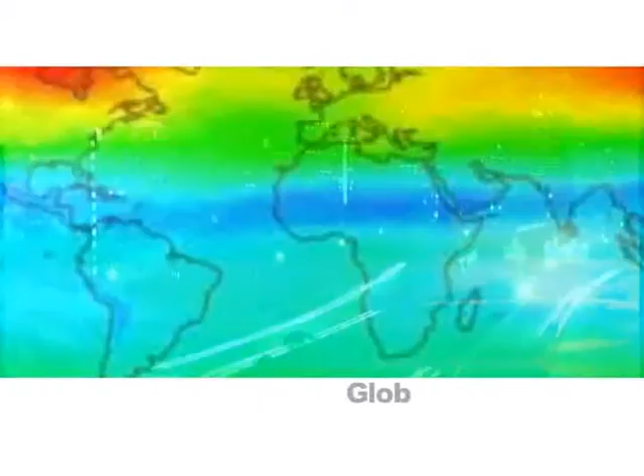Although the sun's light still penetrates, its reflected heat from the Earth's surface becomes trapped, raising the ambient temperature of the globe. The majority of scientists worldwide agree that global warming is now taking place, and most agree that it could have potentially serious consequences for all life on the planet.

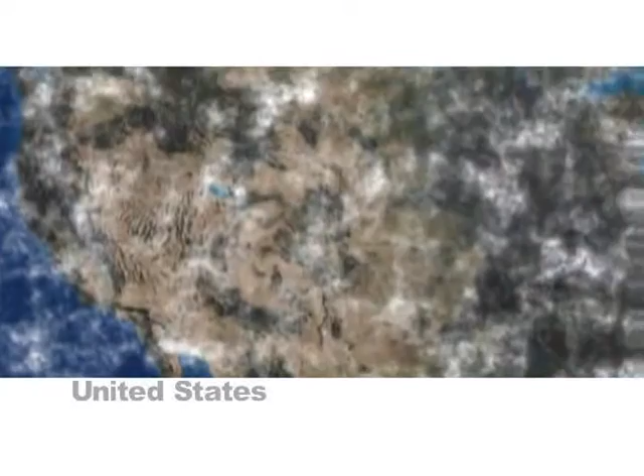Human activities in our largest population centers, the cities, account for the vast majority of these global greenhouse gas emissions. As the world becomes more urbanized, this phenomenon grows. In the United States, the situation is especially evident. Today, 80% of our population lives in urban areas, and more than half live within the 25 largest cities.

American cities and towns now account for over 80% of our national energy use, and urban land use development affects 70% of that consumption. As our urban centers expand at the edges, low-density residential, commercial, and industrial developments claim previous agricultural, forest, and open lands.

And from a resource use standpoint, this development consumes 85% more energy, 70 times more water, 50 times more lumber, and 40 times more land than higher density developments of equal size.

To sustain the diversity of life on the planet, we must change the way we relate to our shared environment and the way it relates to us. Change the way we design, develop, and manage our cities and the way we conduct life in them. This presentation provides a model for that transformation. A shift from communities that consume and degrade our natural resources to communities that consciously sustain them and improve the quality of all life on the planet.

Five overriding principles guide this design. One, the need to utilize all potential sources of energy while controlling all energy-related pollutants. Two, the need to maximize the benefits of natural systems such as wind and water flows, sunshine, precipitation, and the absorbency of land and vegetation.

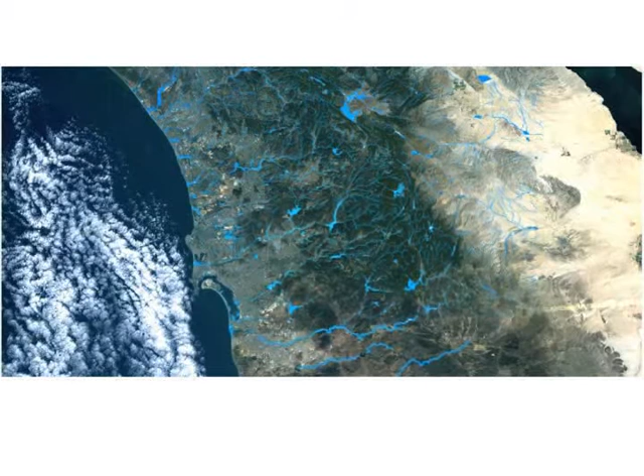The subject for this design is the Greater San Diego-Tijuana Binational Metropolitan Region, chosen to emphasize the importance of a region-wide air and watershed basin approach to sustainable development, regardless of jurisdictional borders. Today, the region supports a population of approximately 4.3 million people. They reside in the city of San Diego, the municipality of Tijuana, 17 additional incorporated cities and unincorporated areas of San Diego County, as well as the Mexican cities of Tecate and Rosarito.

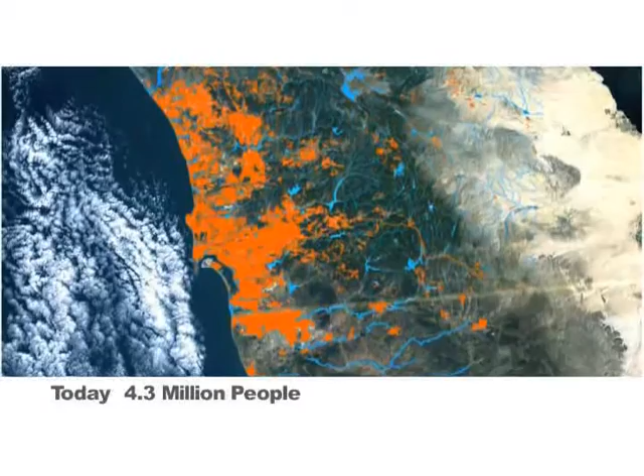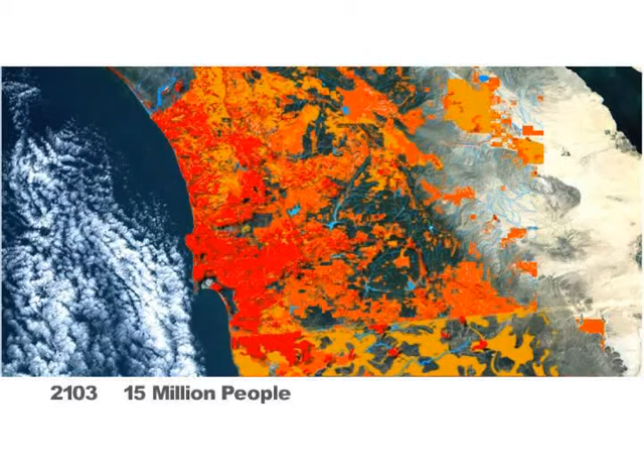Like most urban communities, this binational metropolitan region is growing at an ever-accelerating rate, with the current population expected to soar to 8 million by 2030, and more than 15 million by 2103. Under a business-as-usual approach, this growth will far exceed the current infrastructure planning, financing, and land available for development. And much of this development will be at the expense of ecologically sensitive land, animal habitat, and the remaining farmland.

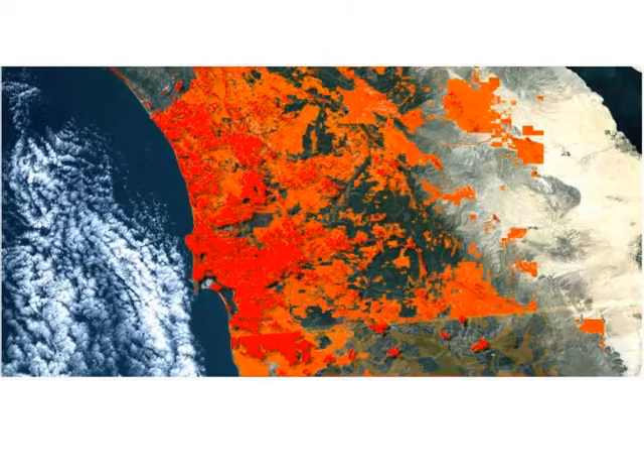Other essential resources such as imported water and energy, the extremely limited stock of affordable housing, and air quality will also be heavily stressed. We now venture into an alternative, sustainable future for the region. A future that accommodates projected population and economic growth without degrading the natural environment.

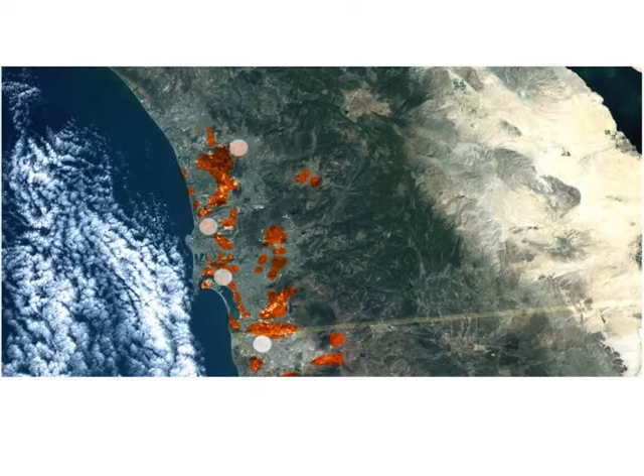In our design for the San Diego-Tijuana metropolitan region, there are 4 urban zones centered on or near Escondido, Sorrento Mesa, downtown San Diego, and downtown Tijuana. Each of these zones contains a hierarchy of primary and secondary cities, surrounded by clusters of smaller villages and their neighborhood communities. We'll focus on one of these urban zones, located on the international border.

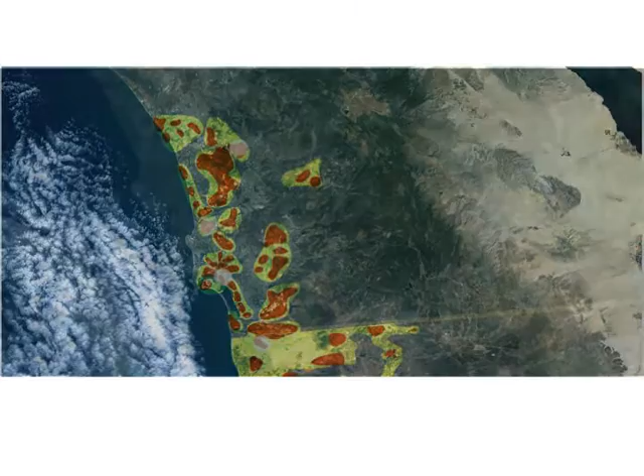Approximately 15 miles in diameter, the zone's primary cities accommodate 750,000 to 1 million residents in densities of 122 to 162 units per acre. Secondary cities accommodate 1/3 fewer residents. Villages are approximately 2.5 miles in diameter and accommodate 40,000 to 65,000 residents at densities ranging from 12 to 75 units per acre.

The highest population densities are in the city and village centers and along transit corridors that radiate from them. These areas support a diverse mixture of affordable housing, retail and business establishments, employment and educational centers, and cultural and recreational facilities. They also serve as the hubs for the regional transportation system.

Surrounding each village is a set of 6 to 8 neighborhood communities, ranging in size from 250 to 310 acres, and accommodating 6,000 to 11,000 residents. Once again, the highest residential densities are found at the neighborhood center with 50 units per acre. These highly walkable neighborhood centers offer easy access to elementary school, shopping, and religious institutions, and civic and office buildings.

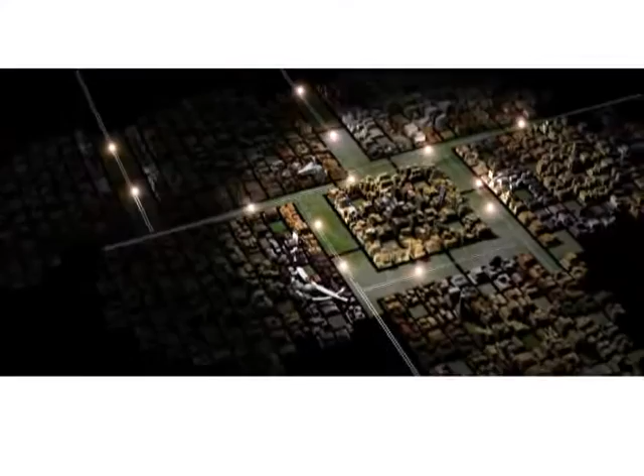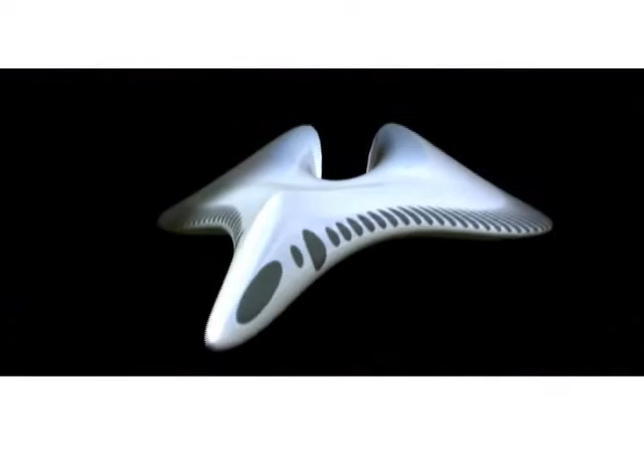In the outer edge of the neighborhoods, residential densities taper off to only 12 units per acre. But a sense of place, engendered by homes of the past and historic districts, remains. Blended wing and vertical takeoff and landing aircraft, marine hovercraft, and high-speed magnetic levitation rail provide the principal means of travel to and from the region.

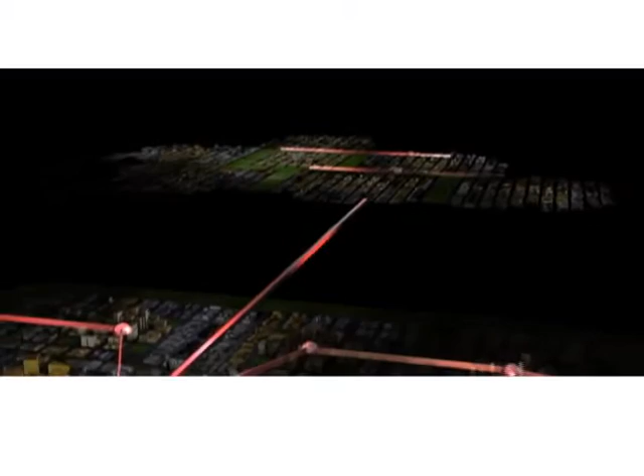This same rail line also connects the primary city centers within the region, as does a network of express flex trolleys connect the primary and secondary cities across the region. Traveling at speeds of up to 50 miles per hour, these computer-guided trolleys move along dedicated guideways, serving stations 3 to 3.7 miles apart in 5 to 10-minute intervals.

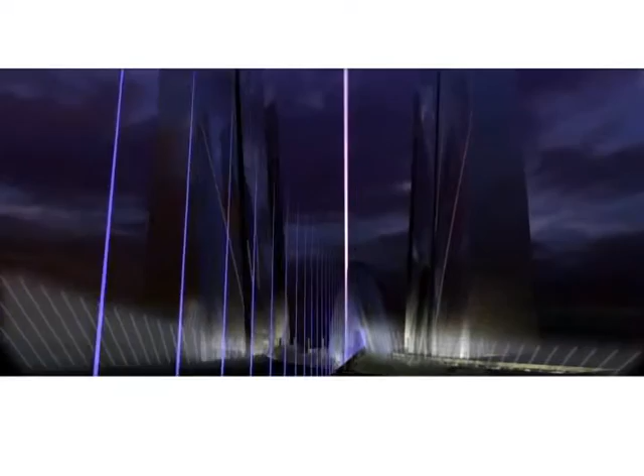Providing service between the cities and their outlying villages is a local express version of the same trolley system, although operating at lower speeds and serving stations spaced every 1 mile apart. The primary transit service between cities and their immediate villages and neighborhood centers is a 3-tiered system comprised of a city-to-village tramway, a village-to-neighborhood feeder line, and a network of inter-neighborhood shuttles.

Together, all of these fuel cell-powered electric vehicles quickly and conveniently move residents across the region, emitting only water vapor to the atmosphere. Complementing this public transit system is a private mobility vehicle, or PMV system. Ranging in size from 2 to 10 passengers, these fuel cell-powered, computer-driven vehicles provide point-to-point transportation on demand from a centrally housed and maintained fleet.

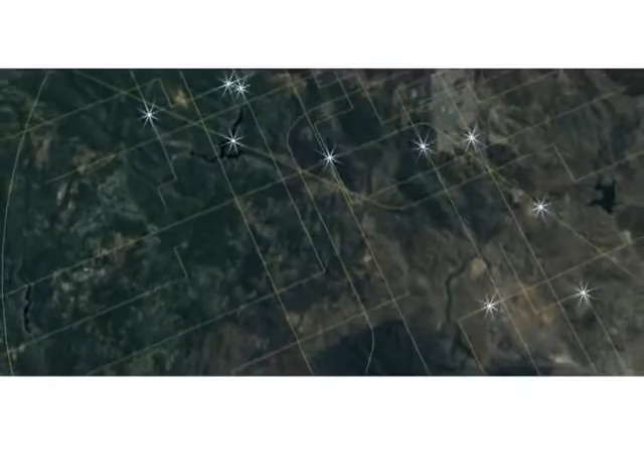Fully automated PMVs enable passengers to set the destination and then relax or focus on other matters, while the vehicle propels itself along sensor-laden guideways. Also available are dual-mode PMVs that allow passengers to take an active role in the process and to travel off of the guideways to remote locations. Most commercial enterprises also use a modified version of the dual-mode vehicle.

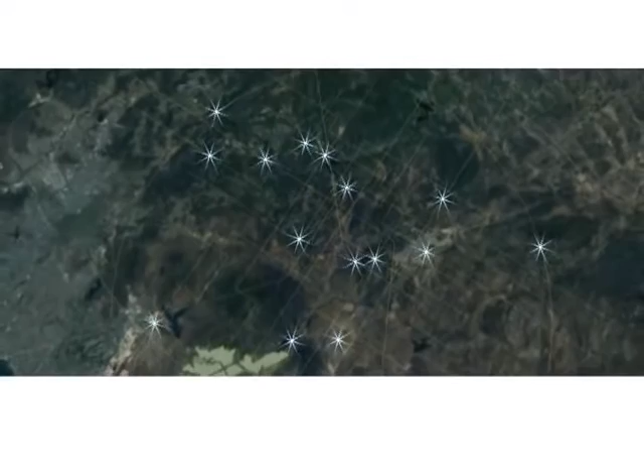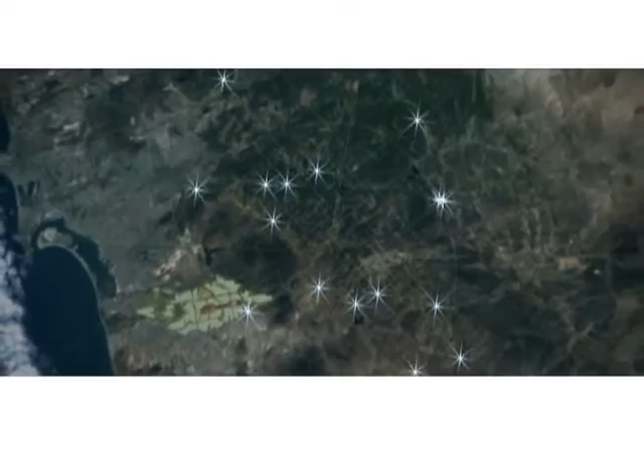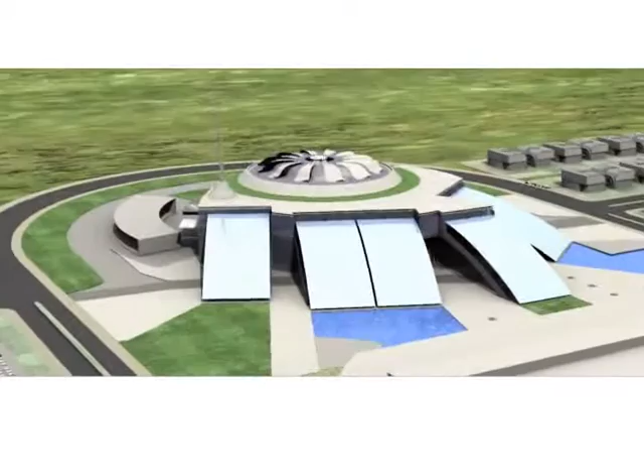This combination of public transit and PMV systems provide residents choice, convenience, and emission-free mobility, and effectively replaces the personal and commercial vehicles of the 21st century. Most of the region's energy and environmental systems are now located close to the populations they serve. This is made possible through the miniaturization and integration of these technologies and their co-location in residential neighborhoods at the Resource Management Center, or RMC.

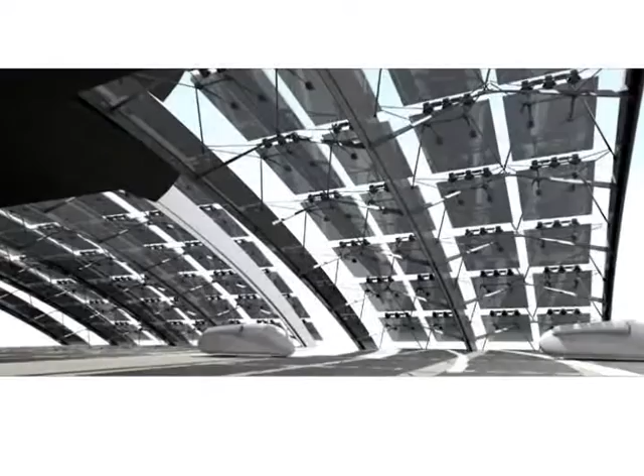From the exterior, the RMC appears to be little more than an attractive 2-story civic building. But on the interior, an impressive array of technology generates, stores, and controls the flow of the neighborhood's energy and receives, reclaims, and recycles its water and solid materials. As we approach the RMC, we notice the expansive array of solar, photovoltaic, and thermal panels that shade the building's elevation. They are producing both energy and hot water for the surrounding community, while they cool the building's interior.

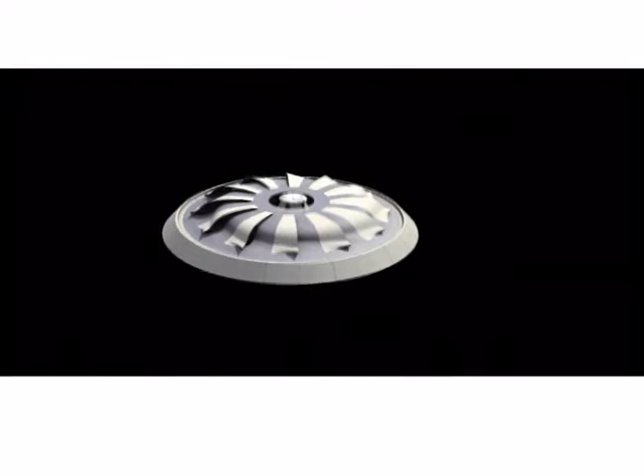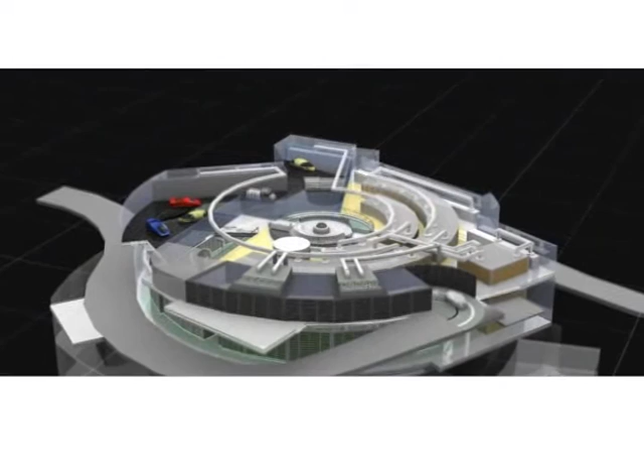We also notice a rooftop plaza capped by a curious antenna. What appears to be moving just above the plaza are rotor blades of a highly efficient wind turbine, converting the coastal airflow into energy. What appeared to be a two-story structure from the exterior is now clearly an expansive four-story structure, with two below-grade floors now visible. Before descending further, we see the neighborhood's PMV fleet operations and maintenance center. Here the PMVs are refueled with hydrogen, produced by the wastewater treatment facility below.

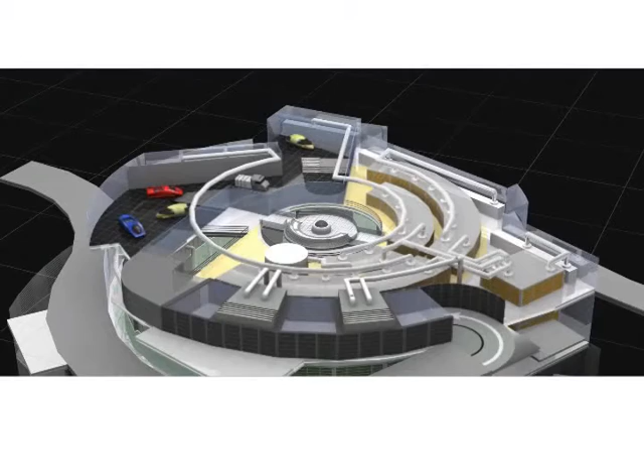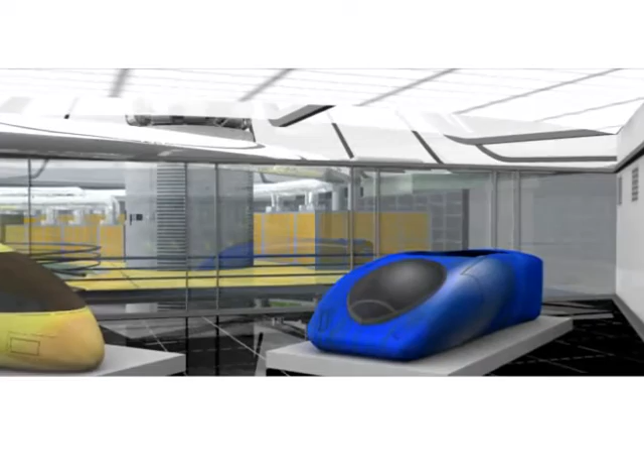The PMVs also share their electrical energy with the RMC's battery banks and serve as mobile sources of electricity for remote activities outside of the neighborhood's electrical microgrid. Private companies maintain showrooms on the PMV level, enabling neighborhood residents to choose from among a variety of models and amenities available to customize their annual PMV leasing programs. And sophisticated computer systems are housed here that manage both the PMV system and the two-way flow of energy between the RMC and its residential and commercial users, and the region beyond.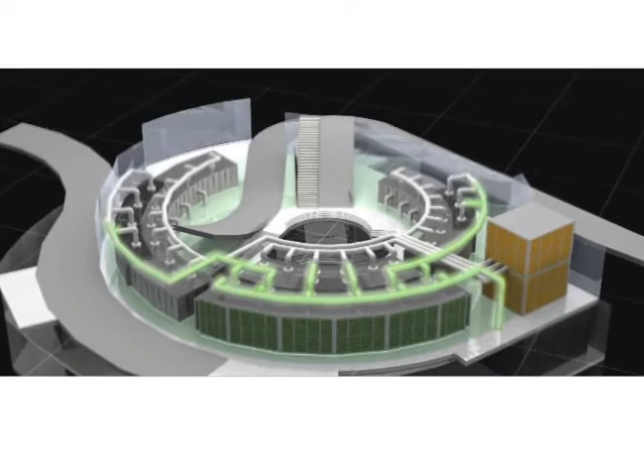At the ground floor level, we see an extensive bank of hydrogen fuel cells. Along with renewable technologies, these fuel cells are the combined cooling, heating, and electricity generation source for the neighborhood. These cells are electrochemical devices that directly convert hydrogen or hydrogen-rich fuels into electricity without combustion.

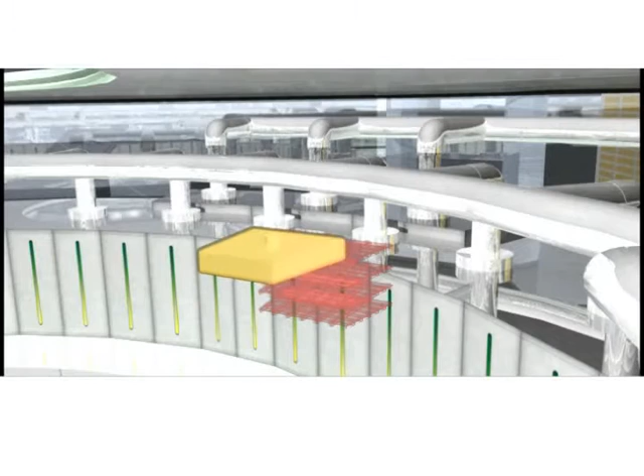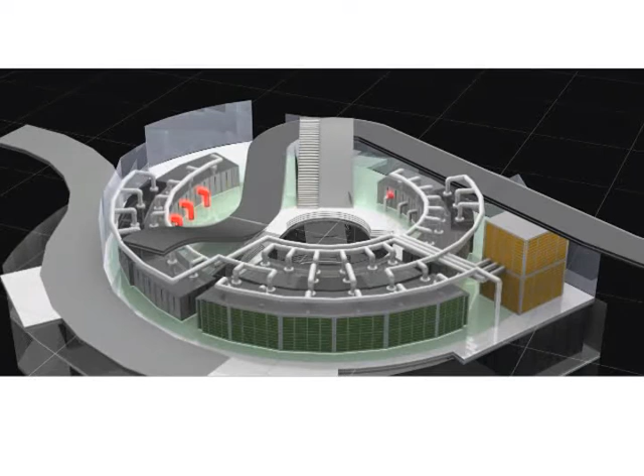Although they resemble batteries, fuel cells never need recharging or replacing and can consistently produce electricity as long as they are supplied with hydrogen and oxygen. This process is much more efficient than traditional thermal power plants, converting up to 80% of the chemical energy in the fuel into electricity. Heat from the fuel cells is collected and sent a story below to aid in the drying and vitrification of sanitary solids. The heat is also used to chill water for district cooling uses in the neighborhood.

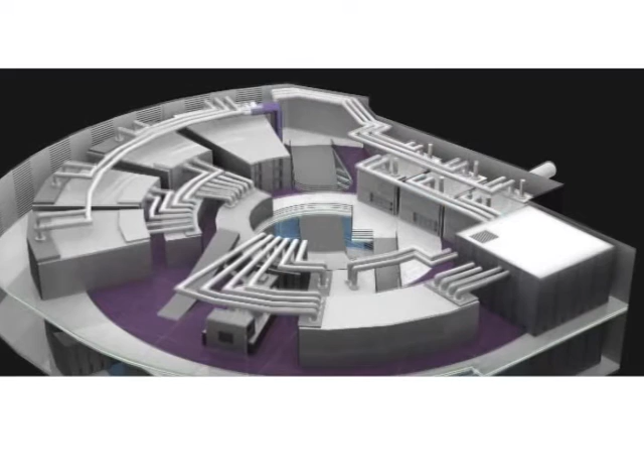Sanitary water flows from the community are received at the RMC through separate gray and dark water intake pipes. Utilizing an electrical current from the RMC's solar photovoltaic system, the gray water flows are electrolyzed to produce hydrogen and oxygen for the fuel cells. Dark water flows are sent to an anaerobic decomposition chamber where bacterial processes produce both hydrogen and methane.

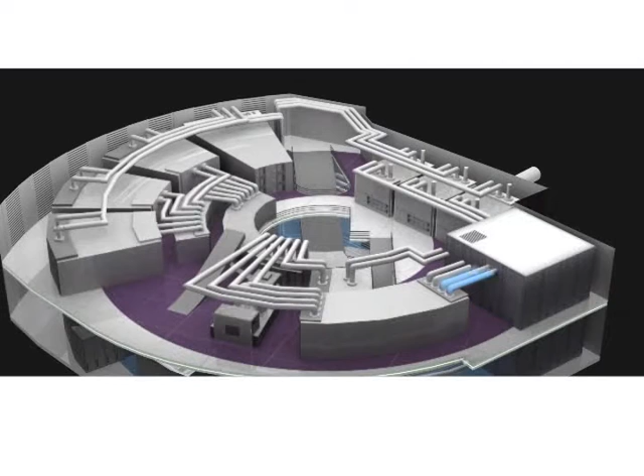Some of this methane is reformed to produce additional hydrogen, while the balance is burned in a glass furnace that turns the remaining sanitary solids into a molten hot material. This material is then quenched in cold water to produce a fine glass aggregate for use in the production of building materials. Recycling of sanitary solids in this manner proves to be far more sustainable than the use of these solids as an agricultural fertilizer, which only recycles trace metals and salts back into the food chain. All remaining waters from this system are then blended and purified with the other major water supply in this particular metropolitan region.

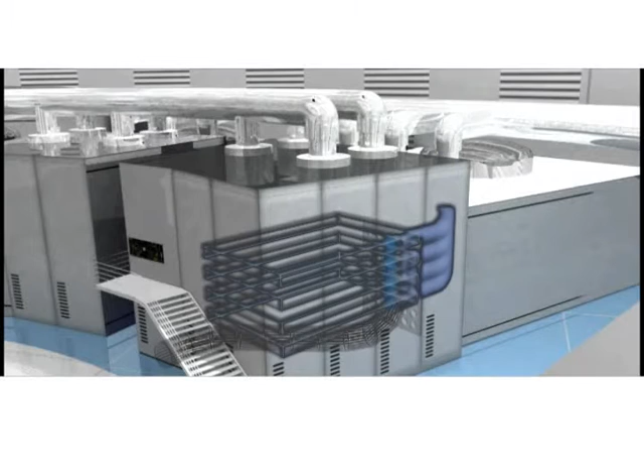At the lowest level, salt water reaches the RMC through a network of inland distribution centers fed by coastal pumping stations and powered by inline micro-hydro turbines. The salt water is sent through an energy-efficient capacitive deionization filtration system utilizing membrane-based seawater treatment technologies. The output is potable drinking water, as well as solid blocks of salt. The water is fed back to homes and businesses through a network of underground pipes, while the salt is sent to regional collection centers for use in a wide variety of industrial processes and commercial products. Essentially, all waters in the region are now recycled for multiple uses.

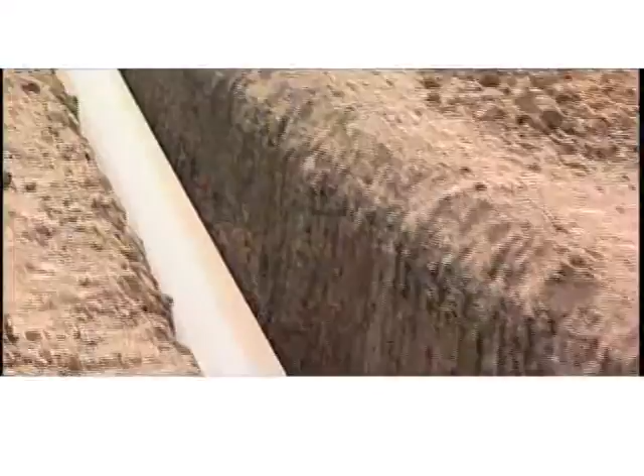Although the RMC produces most of the energy to meet the needs of its neighborhood, it also receives supplemental energy from remote sources. Distant wind farms, geothermal, fusion, and in the case of this region, ocean thermal and wave power facilities also produce and send electricity to the RMCs through underground superconducting conduits. The RMCs within the region also share energy resources with each other through a microgrid similar to the one each shares with its neighborhood service area.

Finally, and most surprisingly, some energy is sent from the RMC to users through wireless transmission. These transmissions energize small appliances and portable electronics in the home and office, eliminating the need for excessive structural wiring in many buildings.

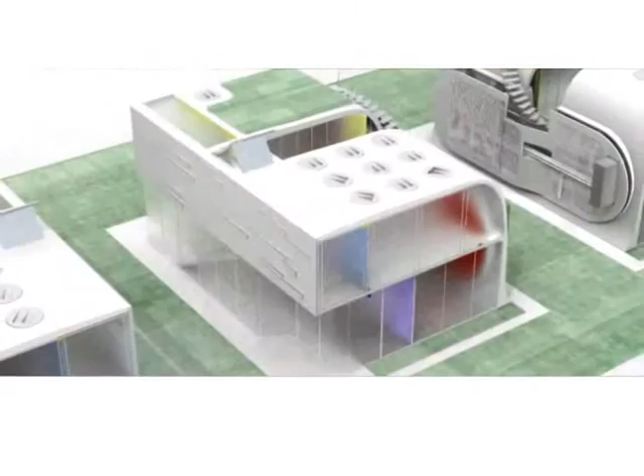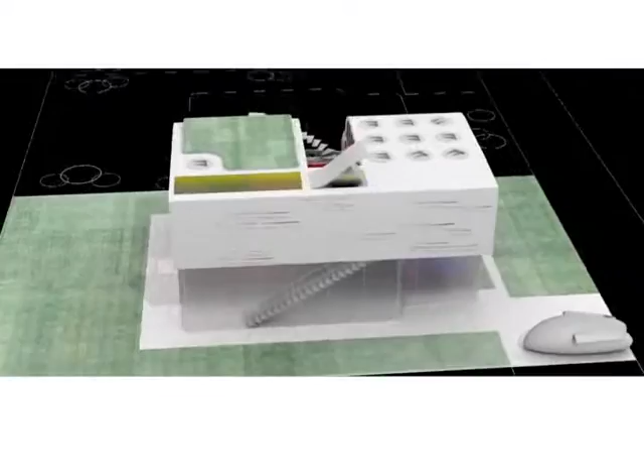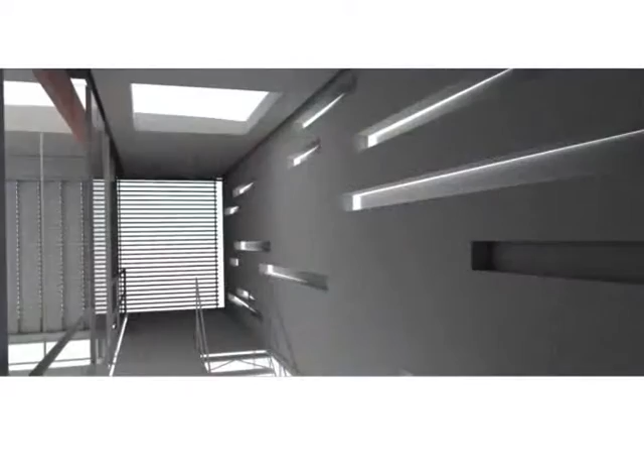Home, as always, is where the heart is. It's also where the heart of energy efficiency is, now a priority for its occupants. Spurred on by the advances in the miniaturization of energy technologies, their integration in building materials, and sustainable design practices, many buildings now produce as much or more energy than they consume. Siting of buildings for optimal solar orientation, rooftop wind scoops, vegetation, and automated clerestory windows all take full advantage of natural light, precipitation, and airflows to illuminate and cool the interior.

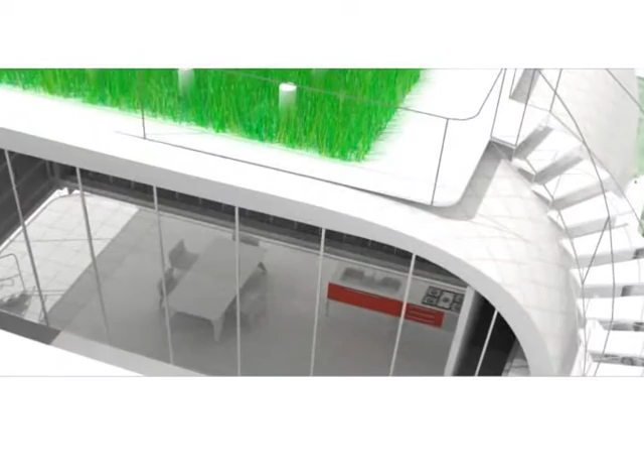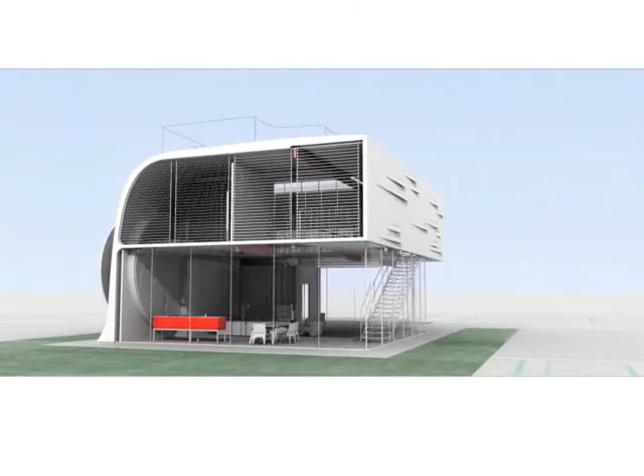Solar photovoltaic wall paints and glass surfaces generate energy, while rooftop solar thermal units heat water for multiple domestic uses. Many exterior glass walls feature electronically triggered coatings that allow residents to modify opacity at will, enabling the instant placement or removal of windows of any size. Modular interior walls are mobile, allowing for the rapid reconfiguration of space to suit any function. Furniture, internal decorative materials, and floor surfaces are comprised of recyclable materials such as wood, plant fibers, and resins.

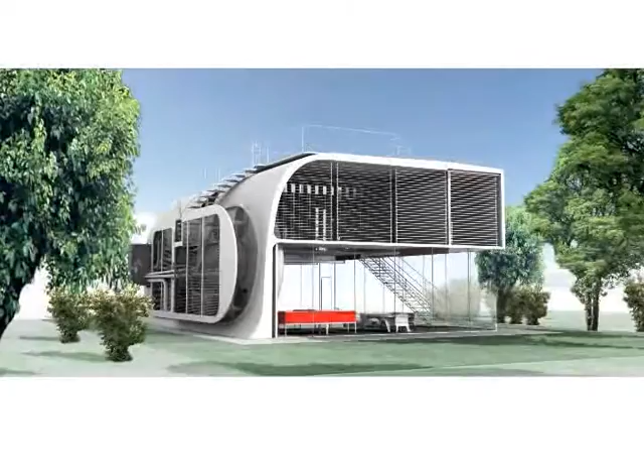Most durable goods are now leased, and manufacturers' take-back and recycling programs have resulted in the practical elimination of all solid waste. Dual piping and separation of water flows from kitchen and bathroom appliances also ensures the continuous reclamation of this precious natural resource. In our sustainable urban system design for the future, human, animal, and plant communities thrive. Our primary goals: optimal usage of our energy resources and our existing built areas, ecologically sound design and development, community commitment, and equal opportunities for all residents have been accomplished.

Can we as a society attain this stunning vision? Do we have the will to begin taking the steps necessary? These are the questions we must all ask ourselves. The quality of the lives of our children and our children's children, and all the generations to follow, will depend on our answers.